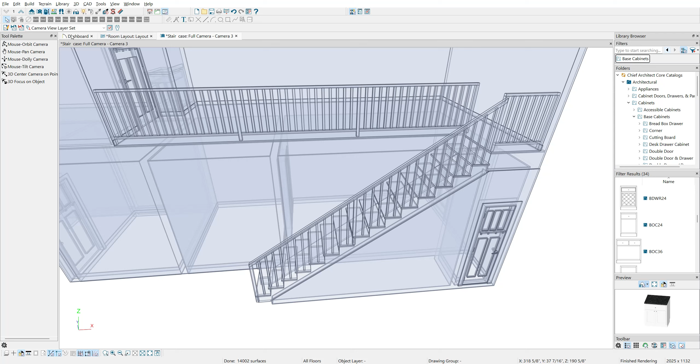Overview with the frame and modification and the shoring up. So this would be your look after it's done. You'll have here the wash area. You'll have your door for the women's bathroom. It will be approximately 7 feet by 9.5 feet, and the wall will depend how that structurally sits.

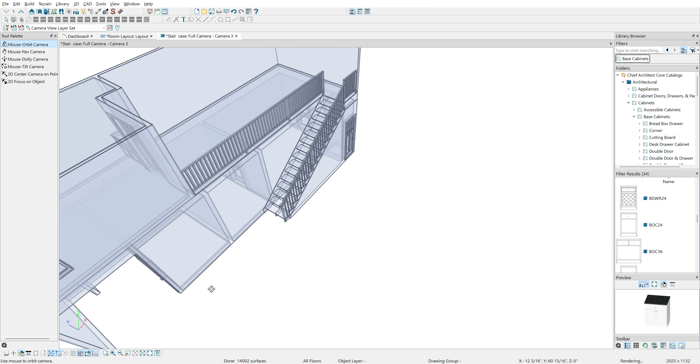We may move that so it's aligned with that, so it could be structurally solid. The wall cavity will be open so it can structurally hold that area and support this exterior wall. Same for your men's bathroom, will be about the 7 by 9. Same thing, we're going to be shoring this up so none of this falls, and basically reconfiguring some of the frame in there and the joists.

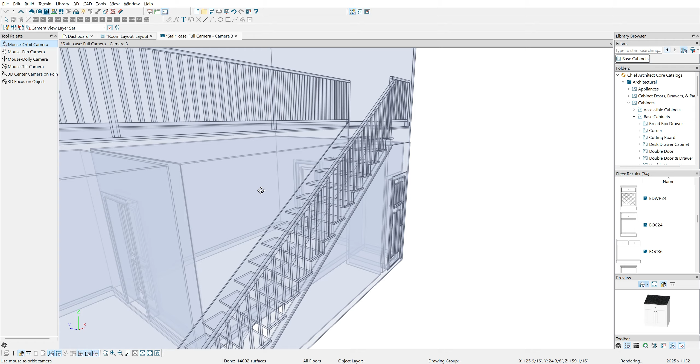So then that will be an open area. We talked about extending the framing wall up to here. We'll add a door here, and this will be your IT. So we'll probably frame this in to where it stops about 6'8". We could leave it out, but I would probably frame this in, and then that would be sheetrocked out.

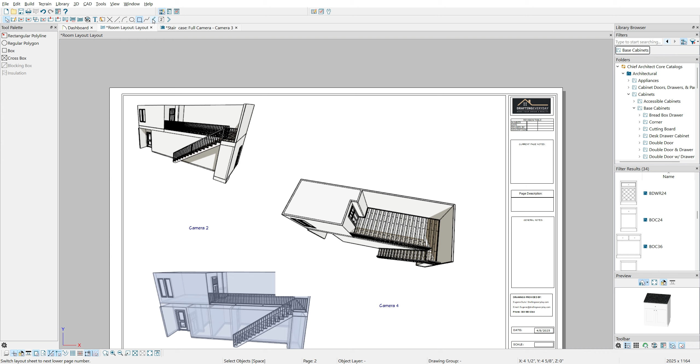Some other areas would be good to cover. Shore up, we're going to brace this so this thing doesn't collapse. This is an approximate area, the office that we took down, so we're going to be doing this work with the structure sitting on top, bracing at an angle so it doesn't skew down or anything moves down.

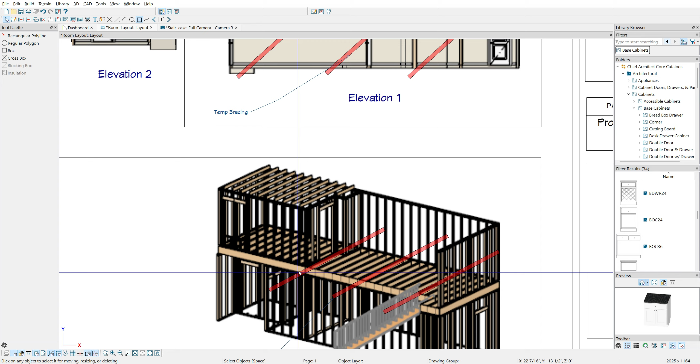And then we're going to shore up your ceiling. We'll see if we need to shore anything up here, but I think it will be fine. Kind of really depends where this wall hits, and I think this should structurally be okay. But if something, we may add another structural brace in here.

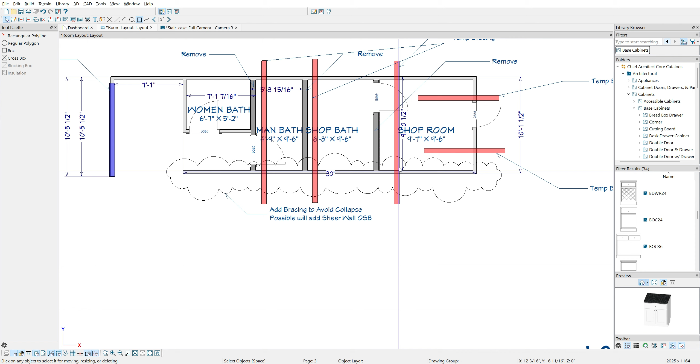As far as more detail of what's being done, as of right now, this permanent bracing has been added, which is supporting the office up above. Now this will be your temporary bracing to hold up the ceiling. This will also go for a temporary bracing as that's being worked on for the staircase. Your new framing, so all this interior structural that's kind of part of this will be removed. Really critical, there's absolutely no traffic or unapproved personnel.

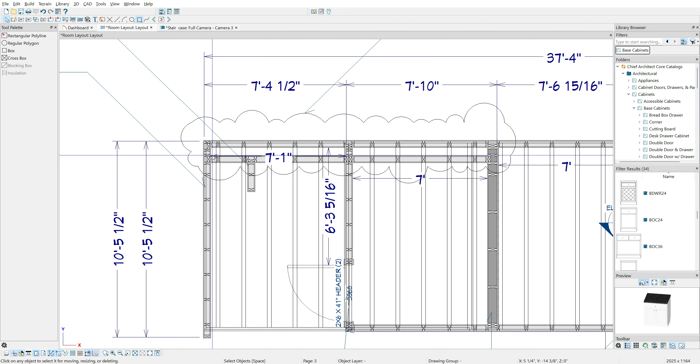Your new look, we're going to have a cavity for your plumbing work. This wall isn't quite straight, there's a lot of jagged corners, and your plumbing stops here. So adding a cavity for the plumbing and electrical will be ideal. That's what we'll plan on doing. Your wall will be extended. We may take this out back so that door can be structurally sound, and just bring it up and rebuild this. All your plumbing and electrical is probably going to be unsalvageable. That's the only thing that's not included in this cost.

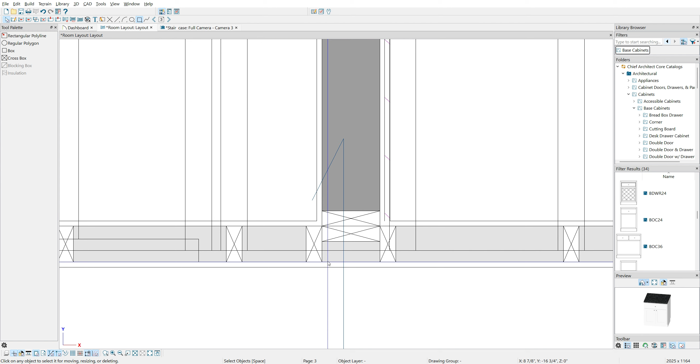So your bathroom gets extended. I'm thinking about doing a 2x6 wall since this is going to be modified. And the reason why we need that brace: usually when you have those walls, they'll have the structural element holding this wall, and that will be removed. So if you've got your 2x4 wall here, that's kind of an issue. So we're going to open this up, put the structural support, connect the walls, and make it structurally sound.

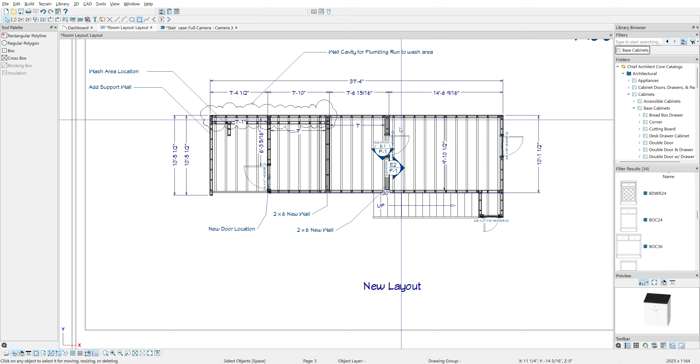As far as your men's bathroom, same thing, 7 feet. Now, because this will be a 7-foot instead of 5-foot, this will be approximately 14 feet. Talked about the wall here. So yeah, very, very critical, just absolutely no traffic. I made a notation on that.

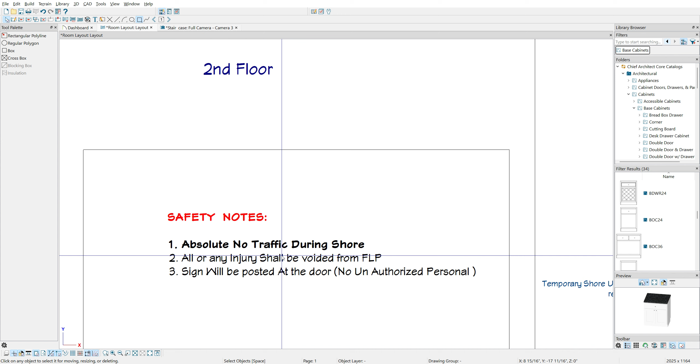We can do a walkthrough with the manager or the supervisor on site, possibly today or tomorrow, because once we remove the structural, we don't want that thing to hurt anybody. So that bracing will basically hold that structure in place. Very good.